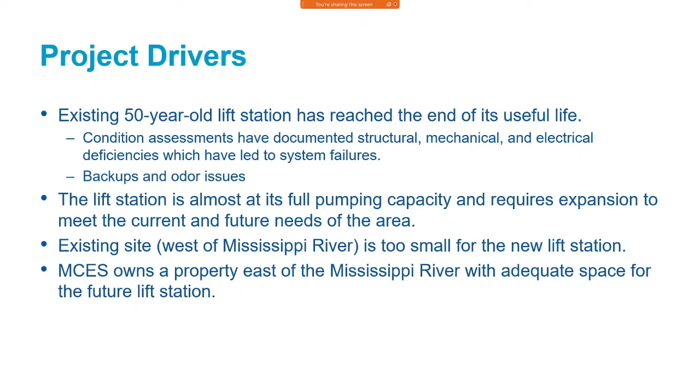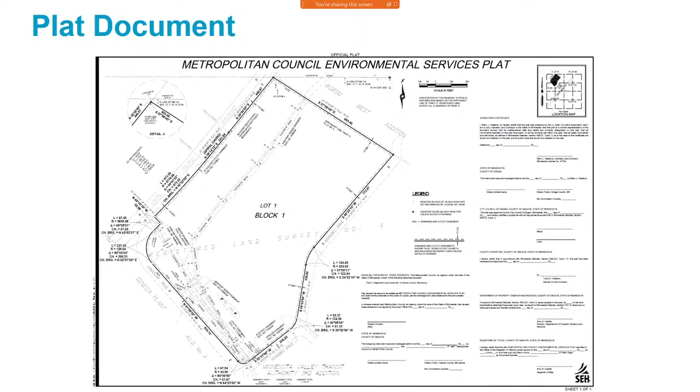So with that, the proposed action this afternoon is that the Metropolitan Council authorizes its regional administrator to sign the final plat for the Metropolitan Council Environmental Services plat located at 3565 Kennebec Drive, Eagan, Minnesota, 55122.

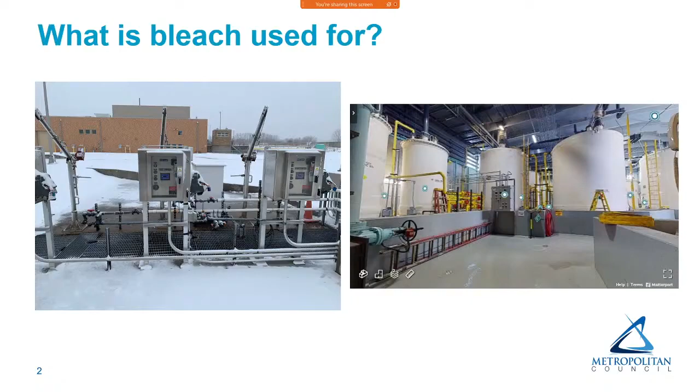So what is bleach used for? Bleach is used for disinfecting our treated wastewater effluent. Essentially, it is there to remove any remaining pathogens that might exist in our wastewater effluent. The disinfection process is a Minnesota Pollution Control Agency required process that happens every year between the months of April through the end of October.

Bisulfite is a little bit different, but it is used in addition to the disinfection process, and is used to dechlorinate the process. Essentially, bisulfite is used to remove any remaining bleach that might be within our wastewater effluent stream so that it is no longer harmful to aquatic life downstream in the receiving water that we discharge the wastewater effluent into. Similarly to bleach, bisulfite as part of the dechlorination process is required as well by the Minnesota Pollution Control Agency during those same exact months from April through the end of October.

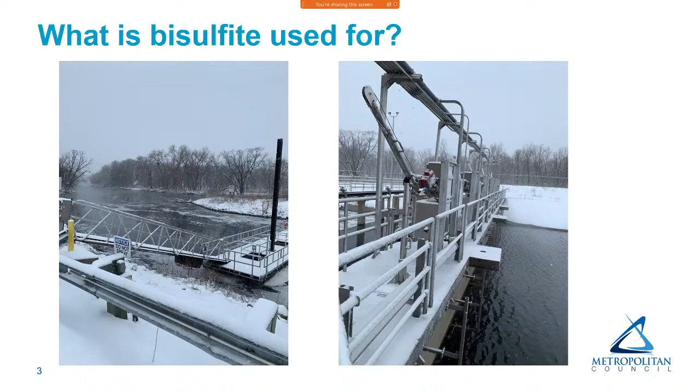To provide a little background and remind you all of this bleach and bisulfite contract, this was brought in front of the Environment Committee as part of an approval for an emergency declaration in February of this year. The existing chemical supplier, DPC, left the distribution area that we are part of. They sold their chemical equipment and company and left our region. At that point, we came to the Environment Committee to get approval for an emergency declaration to allow us to continue to properly disinfect and dechlorinate our wastewater effluent while we went through an appropriate invitation for bid process. That IFB process has been completed.

We've advertised, we've had a public bid opening. The results of that public bid opening were 2 bids received for bisulfite chemical and 1 bid received for the bleach chemical. The lowest responsive and responsible bidder was Hawkins. This is a 2-year contract with 2 optional 1-year extensions.

So with that, the proposed action tonight is that the Metropolitan Council authorizes its regional administrator to award and execute contract 21P122 with Hawkins Incorporated for bleach and bisulfite supply for a total award not to exceed $5,400,000.

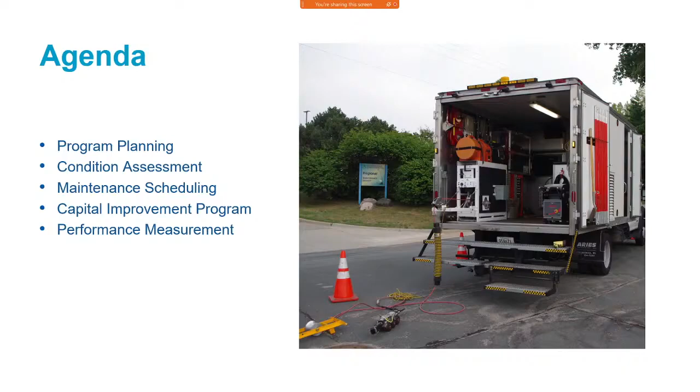So the first two items on the agenda are program planning and condition assessment. And undeniably, condition assessment drives nearly every aspect of our work within the interceptor system. Certainly condition assessment and program planning go hand in hand. A potential trap for any utility is that you can't get ahead of problems because you're always responding to problems rather than keeping up on your review of system conditions. We've always completed condition assessments in the interceptor system, but in 2019 we formalized an internal process for defining when, who, and how condition assessment information is processed.

For our gravity interceptor pipe, and the follow-up tasks that we take when we find deficiencies in the system.

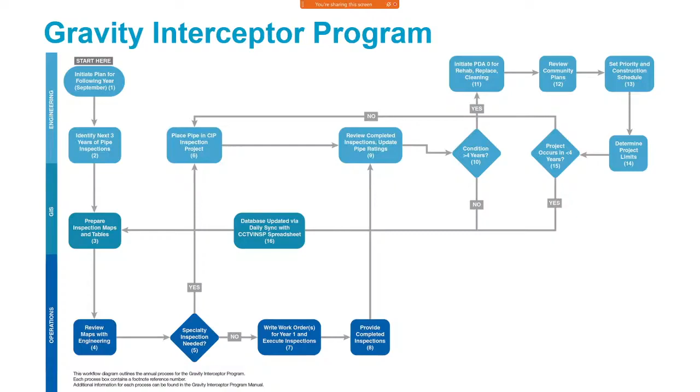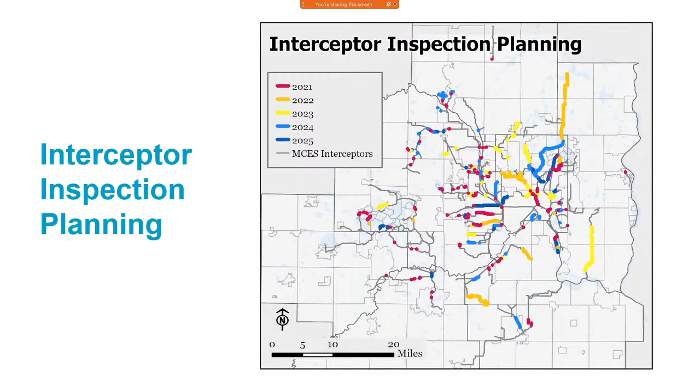Through the process of inventorying the previous inspection dates, we have also identified a schedule cycle for contracting assessment work through the capital improvements program. Contracting assessment work is necessary where we're not equipped to handle larger diameter pipe or deep tunnel installations with our existing equipment in-house at ISBU. Understanding the upcoming goals for both in-house and contracted inspection work allows us to better budget and plan for these activities. Next slide.

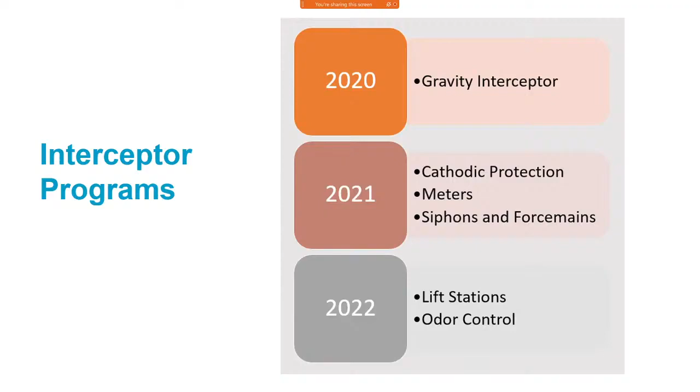With full implementation and success of the Gravity Interceptor program in 2020, we're turning our sights to other asset classes. We're on track for 2021 to finalize programs for cathodic protection, meters, siphons, and force mains. We're looking to complete programs for lift station and odor control in 2022. Next slide.

Adam, can you give me a quick reminder on cathodic? Good question, I was wondering if somebody would ask that. Not too many people are familiar with that.

Cathodic protection is the method we use to protect metal pipe. So if we have, say, some ductile iron pipe that we're burying in the ground, sometimes we will use current to actually protect that pipe and put a charge on it that will prevent corrosion. You also find that very common within our transit group—that's how they protect the rails on the LRT, as well as many parts of tunnel work.

Fascinating, thank you. Yeah.

On the engineering side of the table, these programs are very important in being able to identify and prioritize new projects for the capital improvements program. Any interceptor rated as a 4, which equates to a poor condition pipe, or greater, is entered into the capital improvements program.

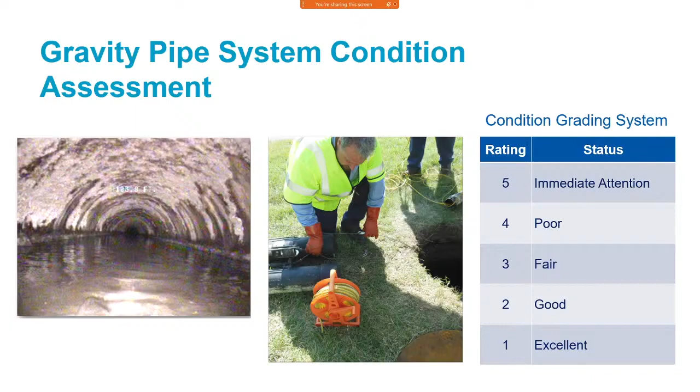And with that, in the next slide, I'm going to turn it over to Bert Tracy. He's going to review some of the things that go on in-house. If we still have Bert on the line—thank you, Mr. Chair and committee members, apologize for that.

As Adam stated earlier, with the full implementation of the Gravity Interceptor program in 2020, the 2020 CCTV footage goal of 308,000 feet was an alignment year based on the information gained through establishing the new program. Staff did an outstanding job of meeting that record high of 308,000 feet for the in-house CCTV inspections. However, by meeting that lofty CCTV goal, that caused ISBU to defer other inspection work that crews would normally have performed, as you can see on the slide.

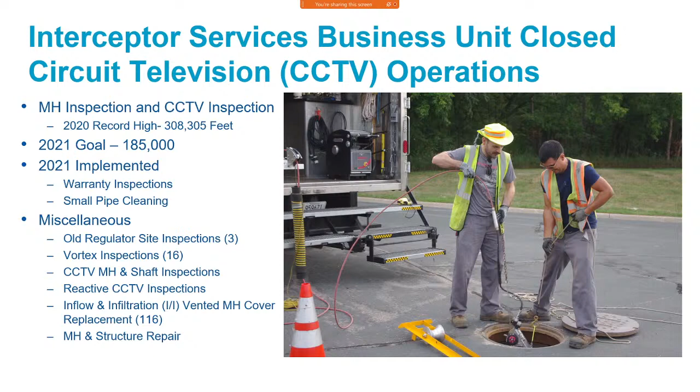We implemented 2 new programs, the warranty and small pipe cleaning inspection programs, and staff was also able to complete the list of miscellaneous inspections that were deferred in 2020. So in 2021, we started 2 new programs and got back to our routine and annual inspections of our miscellaneous sites. Next slide, please.

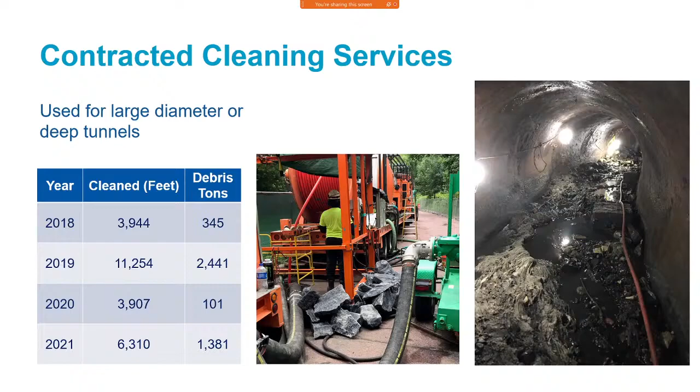The rule of thumb is when the pipe size, depth, and flow exceed in-house cleaning abilities, the business units work together on determining critical areas to be cleaned. The determination is also based on our consultant's assessment of debris buildup in the pipes.

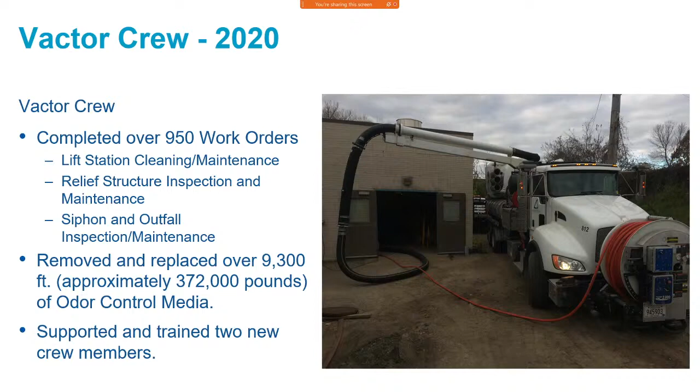ISBU is supported by the maintenance business units, trades made up of machinists, electricians, and mechanics. The trades completed 3,899 work orders in 2020.

Of those work orders, 47% were preventative maintenance, and of that 47%, 379 were designated with project class to improve process and equipment and/or safety. This equates to a 10% improvement in ISBU systems.

This also includes our radar upgrade, converting our flow meters from bubblers or sonar to radar systems, which increases flow accuracy and reduces maintenance. It also includes the addition of what we call our emergency floats in the wet wells of our lift stations. The emergency float starts one pump when the PLC fails and the wet well reaches a high level.

PLC failure is when the automated system fails and we no longer can operate our lift station start-stops automatically, and we lose sight of what's going on at the lift station.

So that upper level, high-level float maintains a level in the wet well until we can get crews out to respond, turn the pumps on by hand, and repair the PLC.

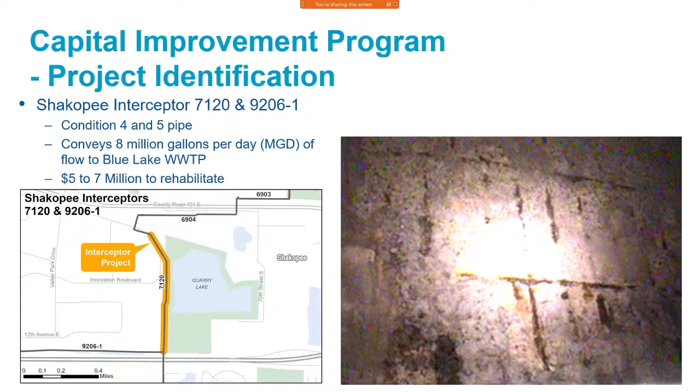We look to fix gravity interceptor pipe like the one shown in the previous slide through one of 2 techniques. Shown on the right is a slip lining project, where a smaller diameter pipe is installed in the original pipe by pushing and or floating it into place. This has the advantage of rehabilitating the pipe without the need for temporary conveyance. The picture on the left is a resin impregnated fiberglass liner that is inserted into a pipe and cured with either heat or light. Most of you are familiar with this construction, commonly referred to as cured in place pipe, or CIPP. In situations where the pipe conditions are very poor or need to be upsized for capacity reasons, a direct replacement of the pipe or interceptor is required.

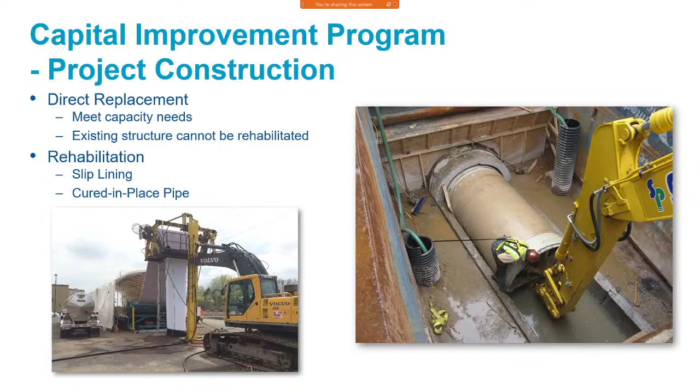And with that, I'm going to turn it over to Bert for the next slide.

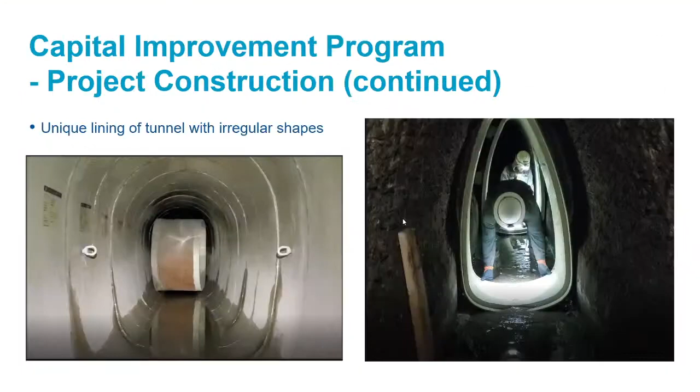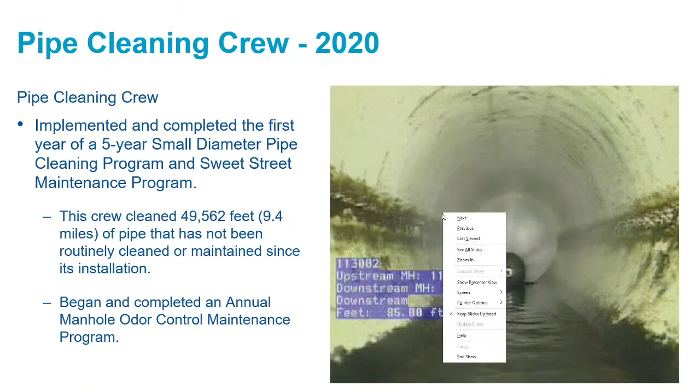Well, Chair Wolf, I wish I could answer that. I've been with the council now for a solid four years. I know they did CCTVing before that, but I'm not sure what kind of footage they did. I might be able to find it if I dig hard enough, but I'm not sure where to look. That's a very good question. I wish I had a good answer, but I do not.

I don't expect you to dig for it. Actually, I started on the council in 2009, and that was kind of an inflection point, because we hadn't been keeping up with enough televising to really know the condition of our entire system. It wasn't enough to get through the whole system in a timely manner to know what the condition was. So there was a change at that point to make sure we were actually checking all of our own stuff, in addition to requiring cities to check their stuff as part of the I&I program.

So that's why I was wondering what it was like before in numbers. I know it was less, but I don't know how much less. Chair Wolf, again, I wish I could answer that, but I know we keep improving and working with wastewater plant and capital delivery. The teamwork we have is really working out well for ISBU and the council.

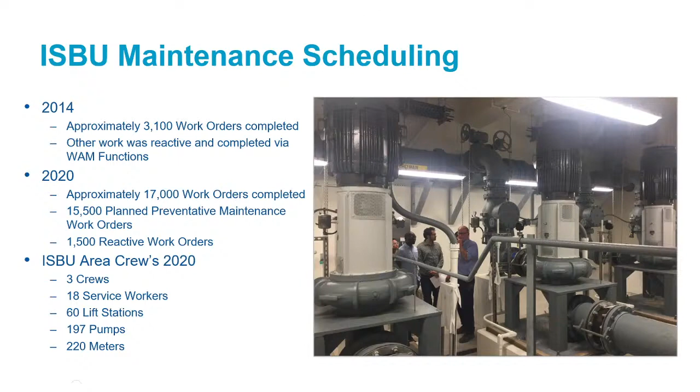I really appreciate that. Everything that we have asked of staff over the years, you guys do, and you do a great job of responding to the needs. So thank you. You're welcome.

Any other questions, comments? Then we would move on to the next agenda item, which would be chloride impacts with Deborah Manning.

Thank you, Madam Chair and council members. Thank you for the opportunity to talk with you today. In this presentation, I will cover chloride impacts to surface water bodies, groundwater, and wastewater treatment plants, including reuse. Again, my name is Deborah Manning. I am the Assistant Manager in Plant Engineering and Wastewater Planning and Capital Project Delivery. And first, I want to say, what is chloride?

Chloride is the anion Cl-. It forms when chlorine gains an electron, and it combines with other elements to form salts, such as sodium chloride, which is table salt. Salts are commonly used as road salt and to regenerate water softeners. Chloride forms different kinds of salts, and they dissolve very easily in water. Once in water, the chloride doesn't break down or go away. Chloride persists, and at high enough concentrations, it's directly harmful to aquatic life, and it disrupts a process in lakes called turnover, which leads to other harmful impacts.

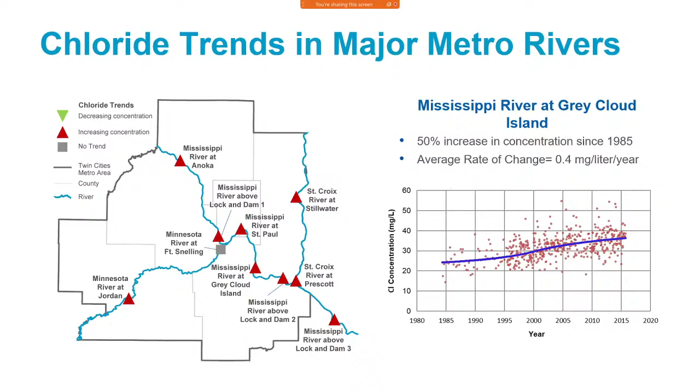Looking at the figure on the right, showing the Mississippi River at Grey Cloud Island, downstream of Minneapolis, St. Paul, and the Metro plant, we see a 50% increase in chloride concentration in the river since 1985.

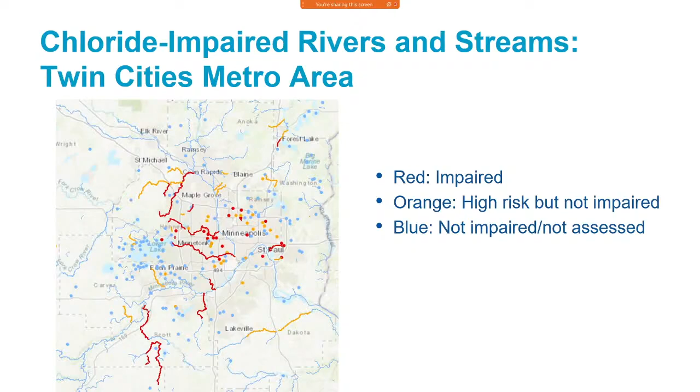The chloride situation in rivers and streams has gotten the attention of MPCA. The MPCA has identified chloride-impaired rivers and streams in the Twin Cities metro area. Impaired means that the water in that stream or lake or river is not healthy for aquatic life because of chloride. Red dots and lines on the map indicate impaired lakes and streams. Orange dots and lines indicate lakes and streams that are at high risk of becoming impaired. Blue dots and streams are either not impaired or not assessed. Our lakes and streams are becoming poisoned with chloride.

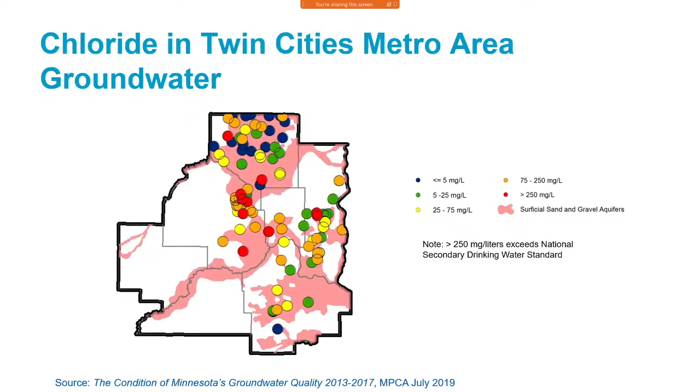If there is reasonable potential for the treatment plant's discharge to cause the water body to exceed one of the standards, the wastewater treatment plant is shown as an orange box on the map. In these cases, MPCA proceeds with including a discharge permit limit for chloride in the plant's discharge permit. However, MPCA has historically taken the approach of working with treatment plants to develop chloride source reduction programs rather than implementing new chloride reduction treatment processes due to the high cost of these processes.

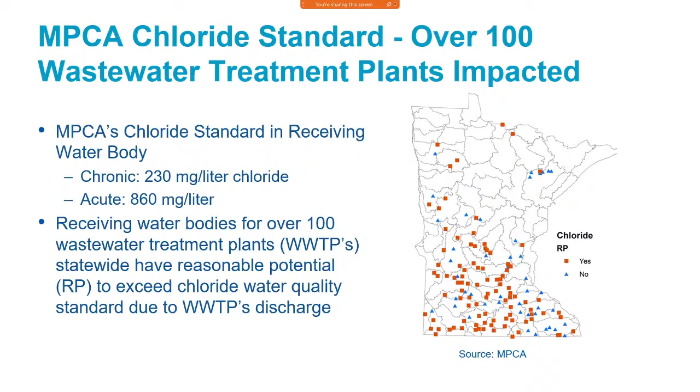Fortunately for MCES, our wastewater treatment plants discharge to large rivers that are not impaired for chloride. And even though the chloride concentration in the three large metro area rivers is increasing, the concentrations aren't yet at the level at which we face a regulatory requirement to reduce chloride in our effluent. But even though this is the case, we aren't ignoring the chloride issue. We are preparing to manage chloride in ways that make sense.

Managing chloride has significant challenges because chloride does not break down. The best treatment does is just separate the chloride from the rest of the water. The technology to do this, typically reverse osmosis, would be a totally new treatment process at MCES's wastewater treatment plants. And it would be, frankly, technically infeasible for our large plants. That's because it produces a reject water in which the chloride is concentrated, so it's a brine, for which there is no feasible disposal option in the Midwest. Given all this, controlling chloride at the source is the best option.

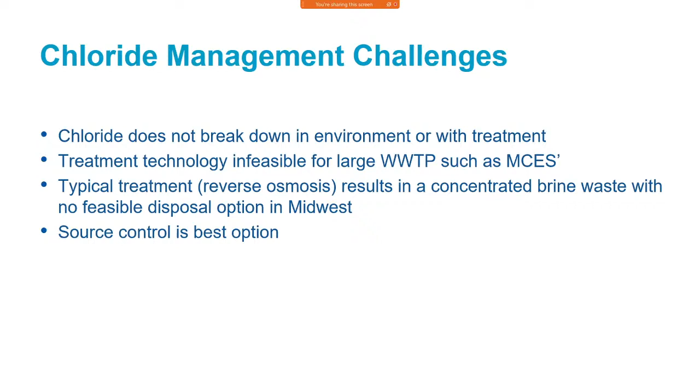How does the type of water softening used in households, commercial entities, and industries result in chloride? These sectors use a softening technology called ion exchange, and ion exchange softeners have to be recharged on a regular basis, and salt is used to recharge the softener. The salt eventually comes off of the softener and into our wastewater as the sites in the ion exchange softener get used up.

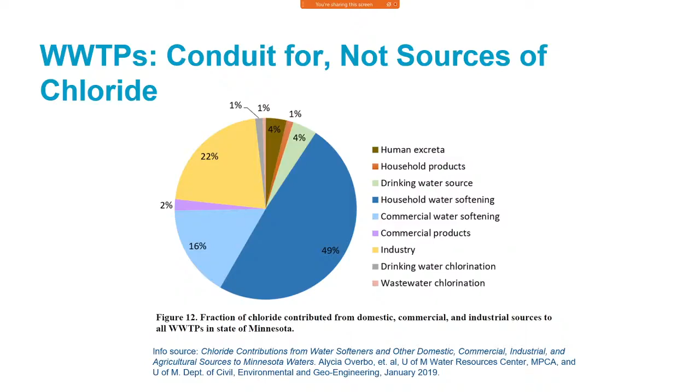Despite the chloride entering MCES's wastewater treatment plants from upstream sources, and despite that amount tending to increase, we don't foresee chloride limits in our discharge permits from our wastewater treatment plants in the foreseeable future.

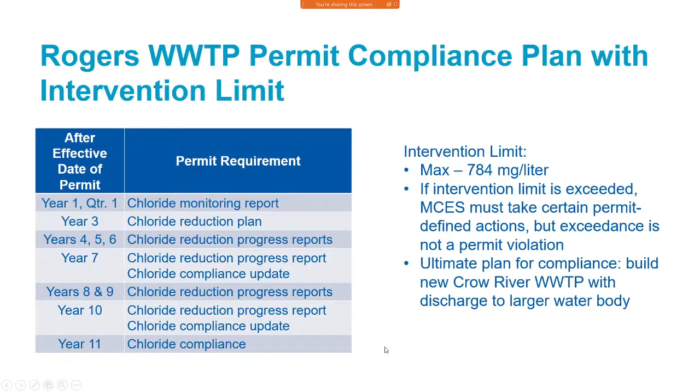Chloride impacts MCES's ability to provide reclaimed water to customers. Wastewater reuse would involve MCES taking water discharged from one of our treatment plants, treating it to a higher level, and providing that water, called reclaimed water, to a user. The reclaimed water produced may have to be treated further by the user for their particular purpose. Chloride comes into the wastewater reuse picture depending on the reclaimed water user's needs.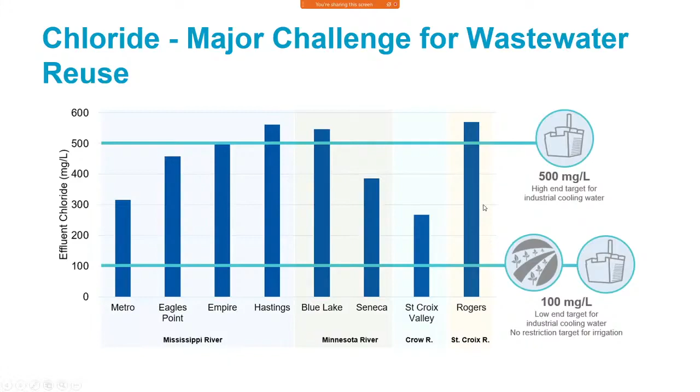MCES sees two possible approaches to managing chloride at our wastewater treatment plants in the future. We could treat to reduce chloride at our plants—this is the end of the pipe approach. This treatment is currently not feasible from a cost or technology perspective. And even if it were, the chloride reduction process results in a concentrated brine for which there is currently no feasible disposal option. The other approach is for MCES and the region's communities, watersheds, and industries to work together to reduce chloride at the source.

For other water challenges, such as phosphorus, mercury, and infiltration and inflow, we've successfully taken this approach and had excellent results. MCES is pursuing the second approach: source control.

We formed an internal chloride team that's been preparing information for developing the 2050 Water Resources Policy Plan, which will have a section on chloride and chloride management. We are looking to the Environment Committee and that advisory group for the policy plan to help us set some strategy for chloride reduction. Ultimately, we will draw on the region's success with other source control initiatives to collaborate with the region's communities, watersheds, and industries to reduce chloride at the source.

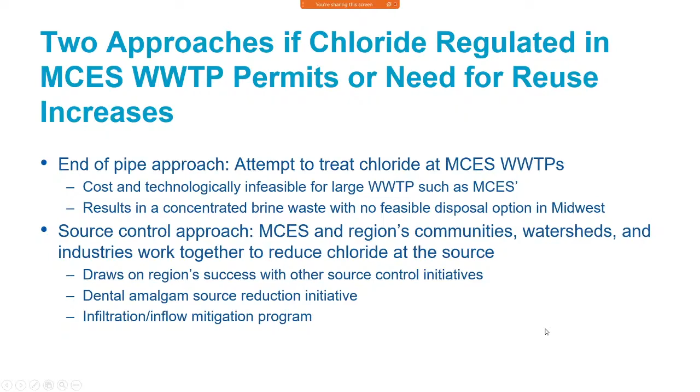I've mentioned that we formed an internal team, and the team's charter includes some outcomes: to prepare MCES to lead in building understanding about chloride issues and develop chloride reduction strategies by collaborating with regional customers and stakeholders, to prepare for the chloride section of the 2050 Water Resources Policy Plan, and finally, to resolve how to address requests from communities and industries about MCES receiving salty discharges.

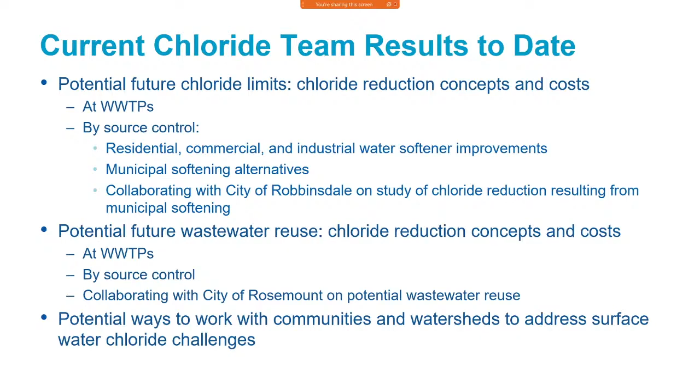In conclusion, chloride is found in commonly used products such as table salt and road salt. It dissolves very easily in water, and once in the environment, chloride does not break down and is toxic to aquatic life and disrupts normal lake processes such as turnover. Chloride concentrations are steadily increasing in metro area rivers, streams, lakes, and shallow groundwater.

Because of the increasing trends and negative impact on aquatic life, the MPCA set water quality standards for chloride. Wastewater treatment plants are conduits for, not sources of, chloride, so source reduction is the best option for managing chloride. Chloride effluent limits in MCES's wastewater treatment plant discharge permits are not anticipated in the foreseeable future. However, the Rogers plant discharge permit includes an intervention limit and a requirement for a chloride reduction plan.

Chloride is also very challenging for wastewater reuse. MCES is getting ahead of the chloride issue because reducing chloride at our wastewater treatment plants would be technically very challenging, extremely expensive, and would result in a concentrated brine for which there is no feasible disposal option.

Source reduction would involve partnerships with local water providers, and MCES is preparing for stakeholder engagement with these potential partners. Chloride will be one of the issues addressed in the 2050 Water Resources Policy Plan, and we anticipate outreach to stakeholder groups about that.

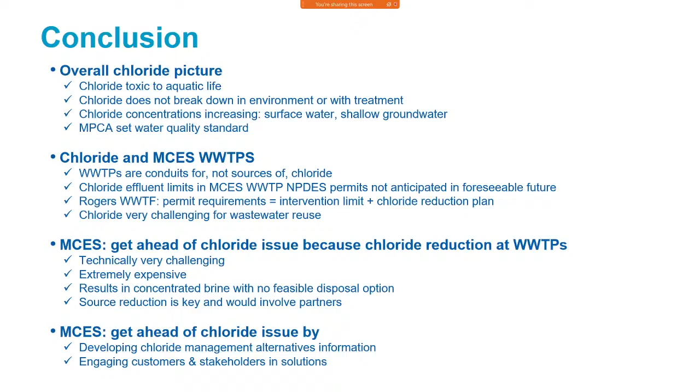For the next steps, the chloride team is finalizing the results and reviewing the results and recommendations with MCES leadership. The team anticipates presenting final results to the Environment Committee after the internal review, and then the results would be available for the policy plan team to use.

MCES understands that chloride impacts all water sectors, that chloride management is challenging, expensive, and pushes the limits of technology, and that we need to work together with customers and other stakeholders. We've been applying staff and financial resources to the issue and collaborating to develop solutions, drawing on past experiences solving costly and complex water challenges. The time to work together to manage chloride is now.

That completes my presentation. I would be happy to respond to comments or questions.